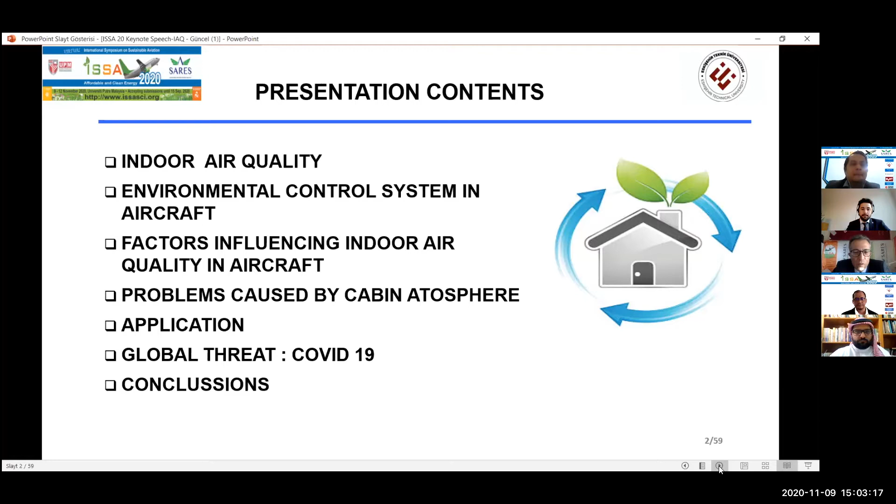Especially in passenger aircraft, comfort criteria and flight safety are a priority depending on the increasing demand. In this context, the manageability of indoor air quality, especially system components, has become valuable to international aviation organizations. The development of effective control systems in indoor air management, pollutant control, and related filtration systems can be seen as important stages. However, recirculation air, reclamation, and fresh air mixtures in aircraft are continuing practice in modern aircraft, meaning that especially life-threatening pollutants are given back into the same environment.

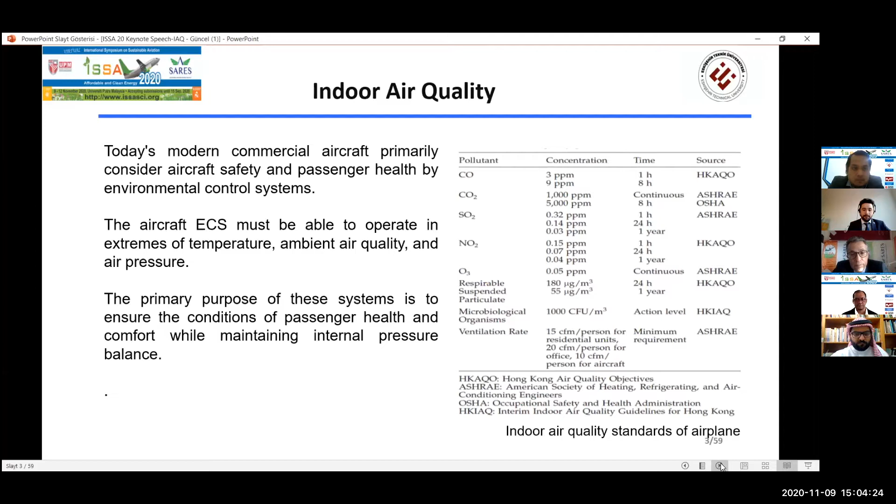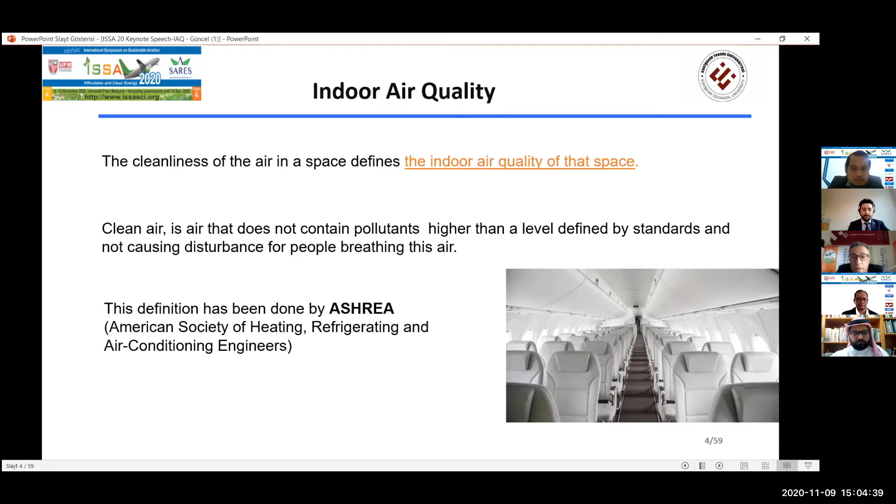In international standards, CO2, CO, ozone, relative humidity, and temperature have been accepted as basic parameters of indoor air comfort standards. The keys to clean air include a high rate of fresh air flow, high efficiency particulate air filters, commonly called HEPA filters, and design of aircraft airflow distribution.

The biggest factor in cabin air quality is inflow of fresh air. Aviation regulatory authorities such as the Federal Aviation Administration and the European Aviation Safety Agency require a minimum rate of 0.55 pounds per minute of outside fresh air flow per occupant. In a large commercial passenger aircraft, that means a typical environmental control system may replace the air occupying the cabin every 2 or 3 minutes, about 20 to 30 times per hour. By comparison, the general guidance for fresh air inflow in buildings is only 4 changes per hour.

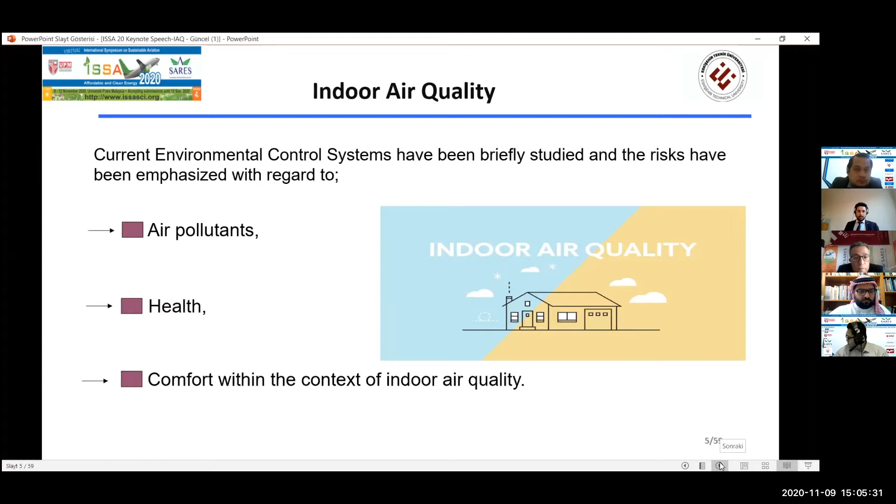In this presentation, current environmental control systems have been briefly studied and the risks have been emphasized relating to air pollutants, health, and comfort within the context of indoor air quality.

Recently, the number of passengers who prefer traveling by aircraft has increased substantially. These passengers are people who probably suffer various ailments and are of various age groups.

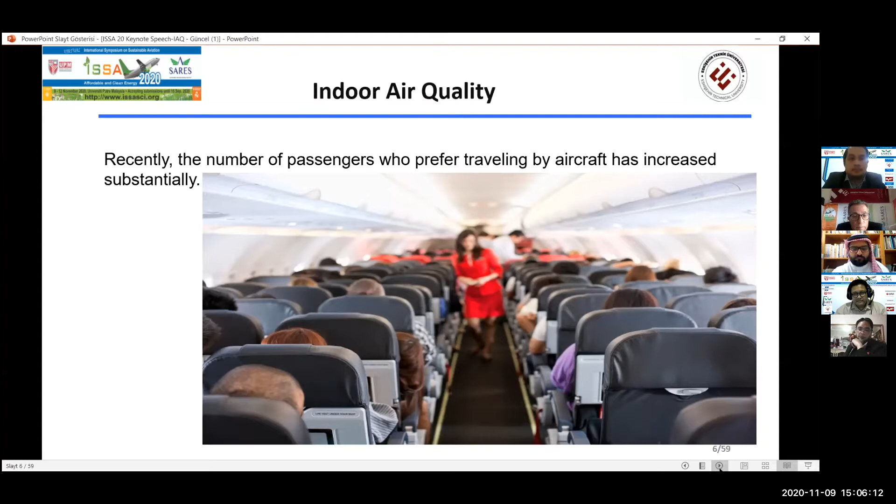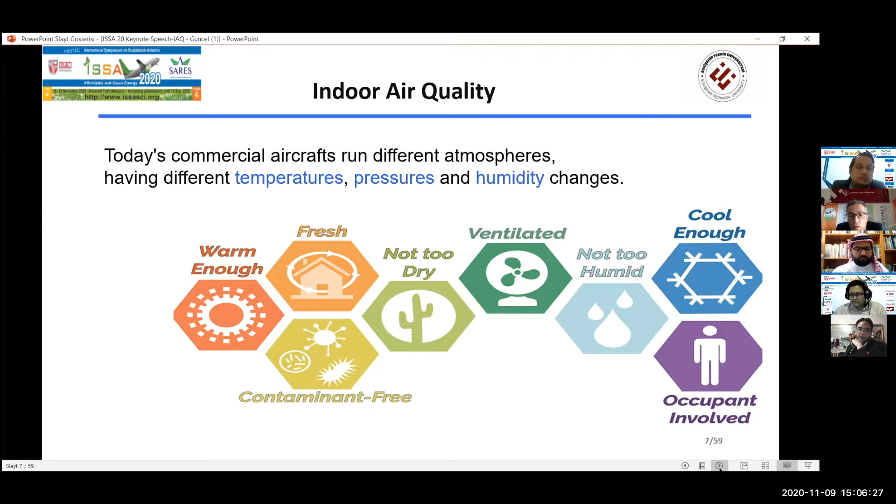Today's commercial aircraft run different atmospheres, having different temperatures, pressures, and humidity changes. Aircraft cabins have indoor characteristics similar to those in houses and office buildings. But still, these cabins differ from other buildings in some respects, such as available space per person, pressurizing requirements, and activity levels within the cabin.

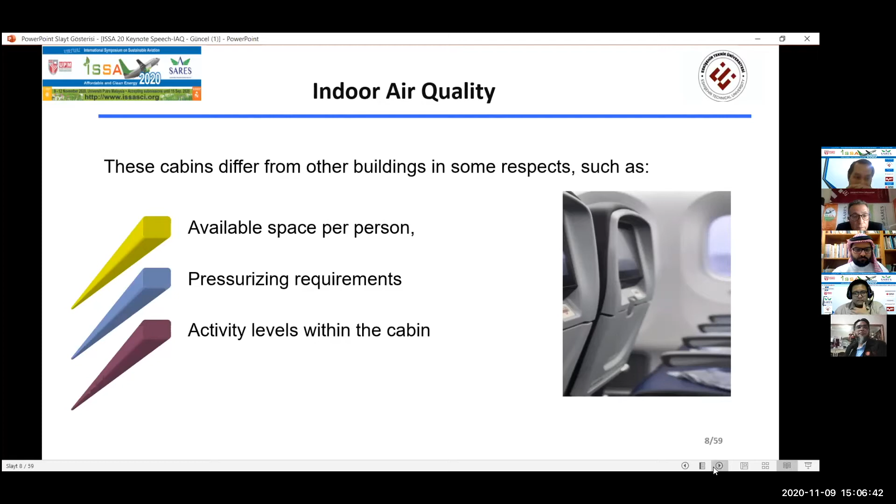Passengers are exposed to atmospheric factors such as reduced air pressure, various air pollutants, ozone, carbon monoxide, and other organic chemicals and biological structures, and low humidity.

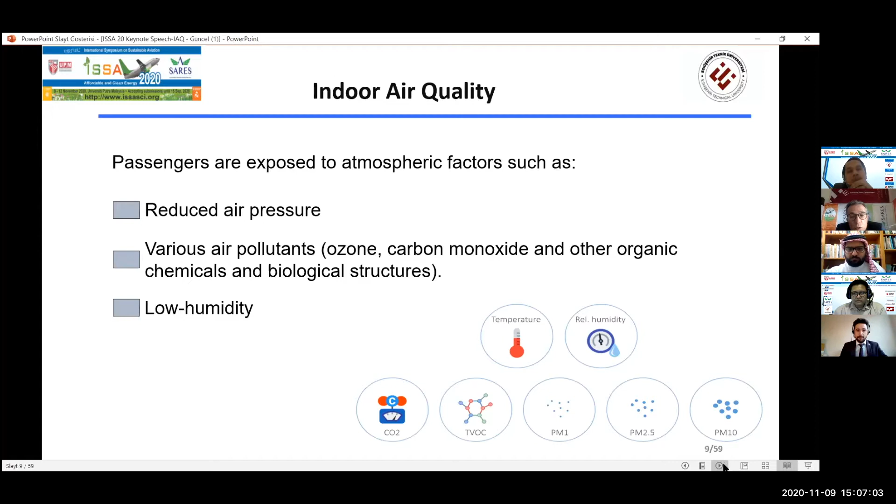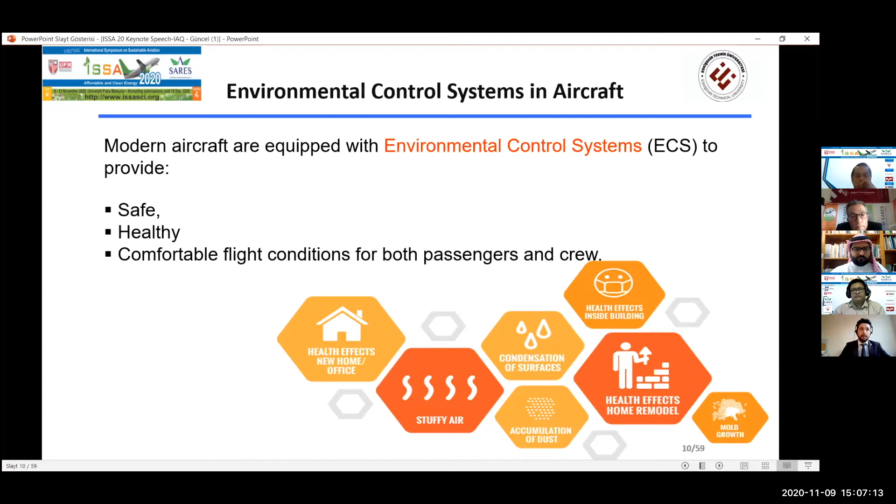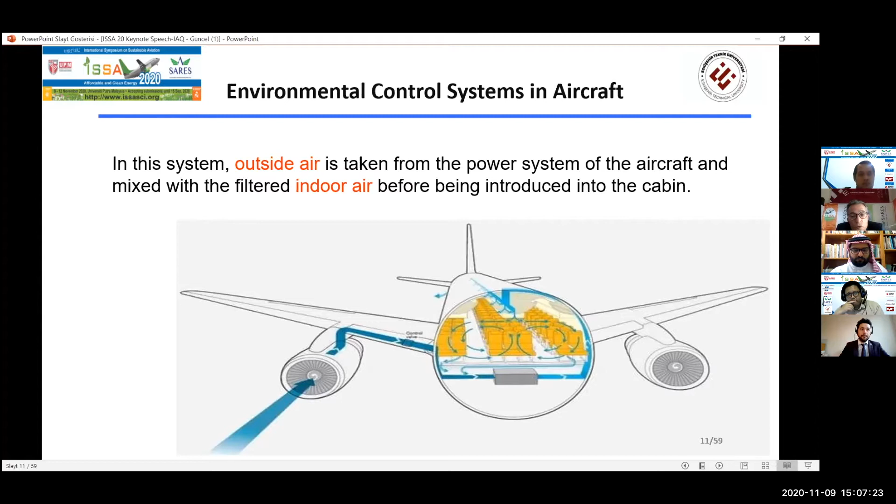Modern aircraft are equipped with environmental control systems to provide safe, healthy, comfortable flight conditions for both passengers and crew. In this system, outside air is taken from the power system of the aircraft and mixed with the filtered indoor air before being introduced into the cabin. This has been designed to reduce air pollutants that can possibly enter the cabin and to control temperature, pressure, humidity, and ventilation of the cabin air.

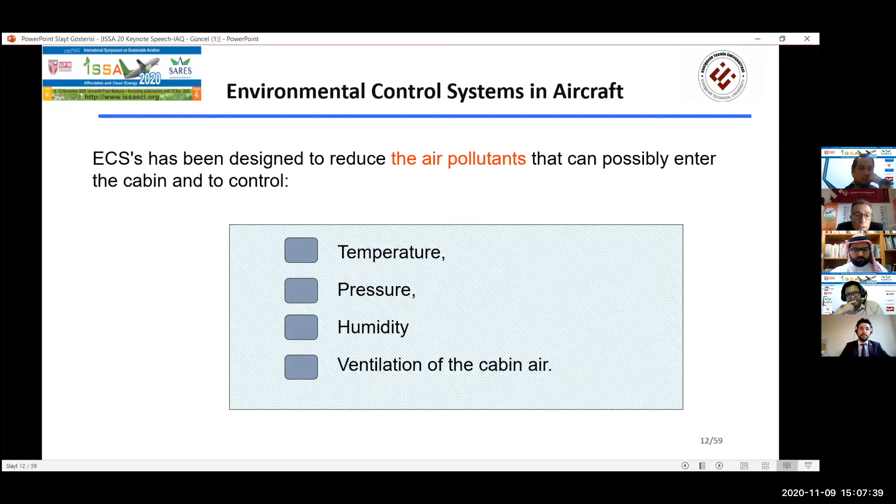The environment that today's aircraft travel in is not the atmosphere with physical conditions that people can live in without any protection. For this reason, rather complicated ECS systems are used in modern commercial aircraft. Environmental control systems have been designed to meet physiological needs of human beings in any flight condition and to provide defined comfort levels during the flight.

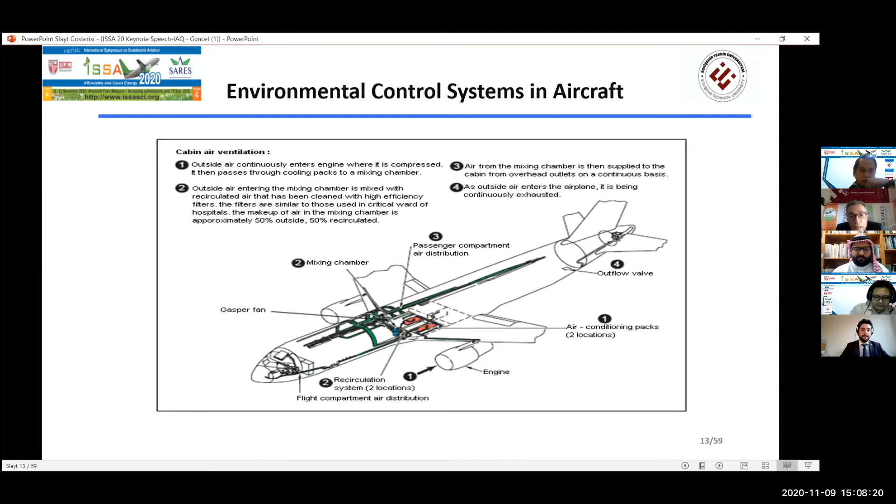The design of the cabin ventilation system is based on introducing ventilated air into a row of seats, collecting and discharging the air from the same row. Such an approach essentially reduces the risk of spreading infections within the aircraft cabin.

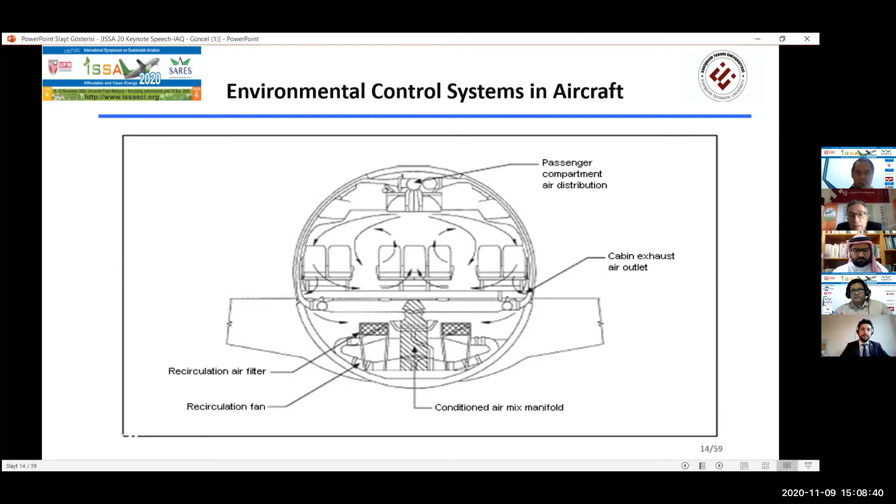The environmental control system is the most important component for the passenger and flight crew, providing a safe and healthy flight, especially in different environmental conditions. This system provides pressure balance and flight safety. Air distribution system is an important component of this structure.

The environmental control system of the aircraft provides air supply, thermal control, and cabin pressurizing for the crew and passengers. Avionics cooling, smoke detection, and fire suppression are also commonly considered part of the aircraft's environmental control system.

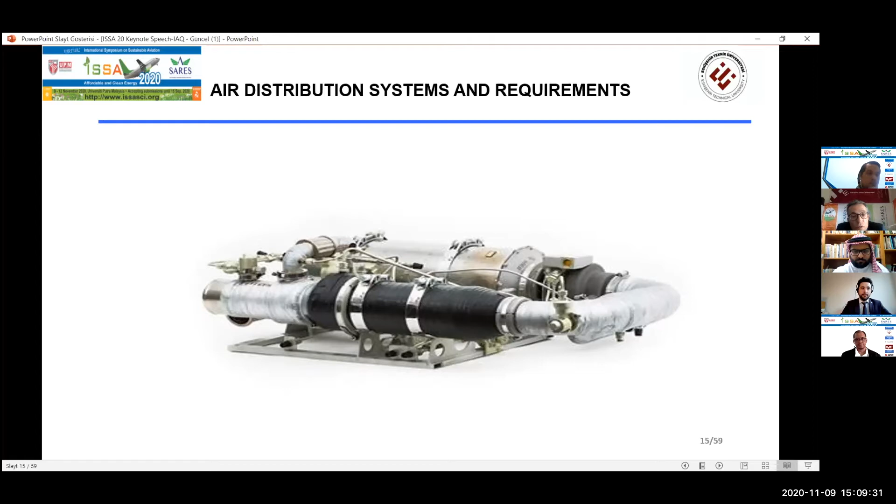The system providing effective distribution of the air in the cabin is differently conditioned for each part of the aircraft. The performance of distributed air is related to the air circulation coefficient. The minimum and maximum values of circulation coefficient are 10.4 and 26.4 respectively, depending on cabin type and capacity. Cabin air is renewed every 2 or 3 minutes.

The use of HEPA filters and top-to-bottom air circulation ensure aircraft cabins continue to be a safe environment for all passengers on board.

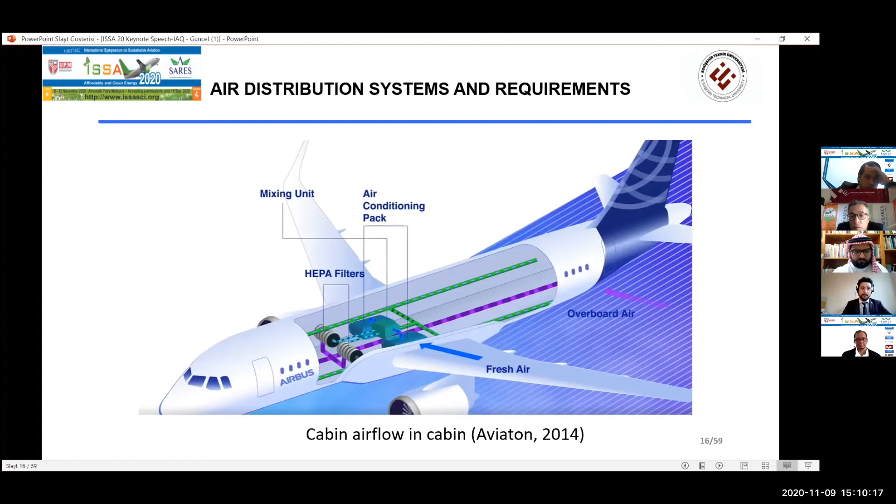Management of air conditions in cabin air conditioners, pollution parameters, and homogeneous air distribution are based on a multi-directional management infrastructure. Although the prediction of the standards is 50% for recirculated bleed air, this ratio can reach up to 80% in some applications. Thermal comfort must be managed with respect to the flow chart, which includes seasonal and altitude conditions. These parameters are a little bit different in the aircraft.

In an example, the hot bleed air must be cooled off first. The directed air is chilled and sent to the heat exchanger. The bleed air is chilled in the expansion turbine. Then it is sent to the distribution system after the relative humidity is controlled.

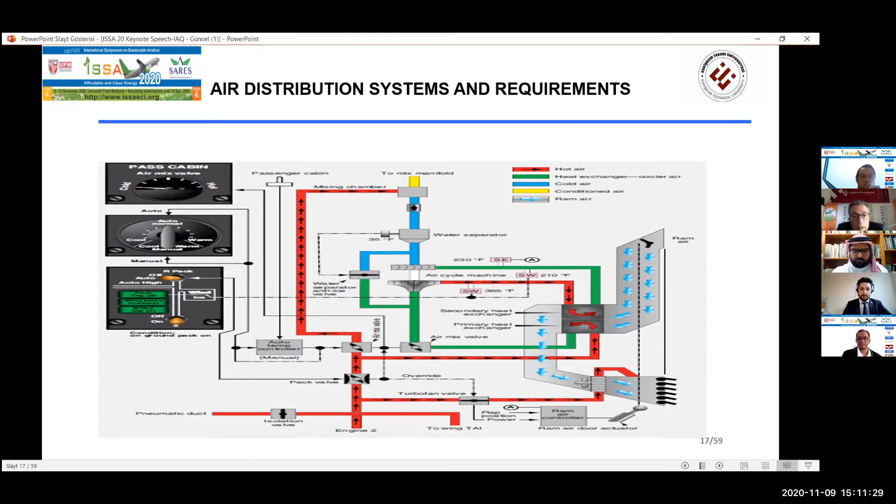Cabin ventilation has several optional features. This includes the humidity envelope, using a source of dry ventilation air to provide radiant heating and cooling the cabin space, using appropriately thermal conditioned ventilation air as the envelope air supply to raise cabin humidity by preventing cabin air entering the envelope where its moisture will condensate on the cold fuselage, to protect against fire risk, and to facilitate the energy saving potential of new aircraft ventilation ejector technology.

Thermal comfort management should be seen as a very important issue. Simulations on this issue in the literature have shown that it is not possible to achieve a fully homogeneous effect, especially when considering the passenger.

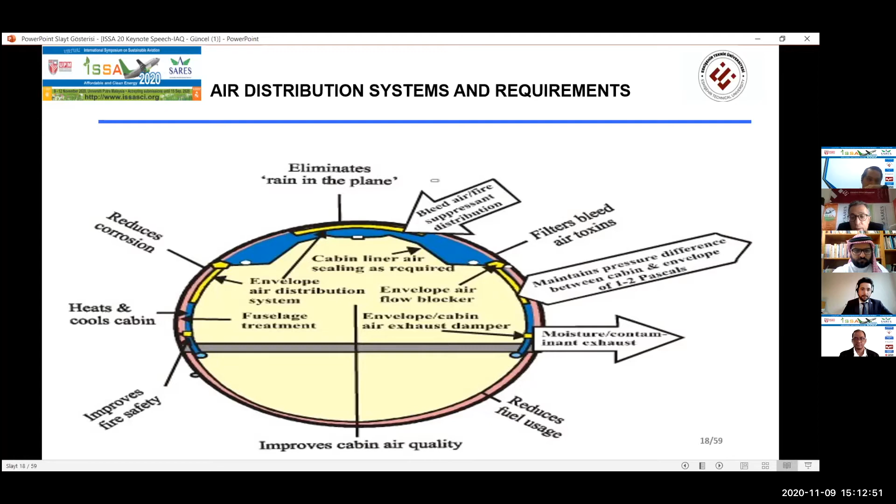For the passenger, a closer look at the local comfort rating shows that existing distribution infrastructure has some disadvantages for some body parts. The thermal comfort management of distribution systems is not fully realized, especially depending on the climate conditions.

The comfort conditions must be taken into consideration for each passenger, but current system designs are far away from this point. The control of average speed and flow rate from the blowing duct gives very average comfort results. Mixing air rate is also determined over these average values.

Thermal comfort conditions for summer and winter are determined accordingly. In general, the cabin temperature is set at 29 centigrade as maximum.

Different methods are used for cleaning of recirculated air: HEPA filter, active carbon, and cold plasma. The distribution ducts have different structures. The current duct systems cause problems in meeting thermal comfort conditions, especially for commercial flights. That's why there's a need to manage local control structures along with IT architecture.

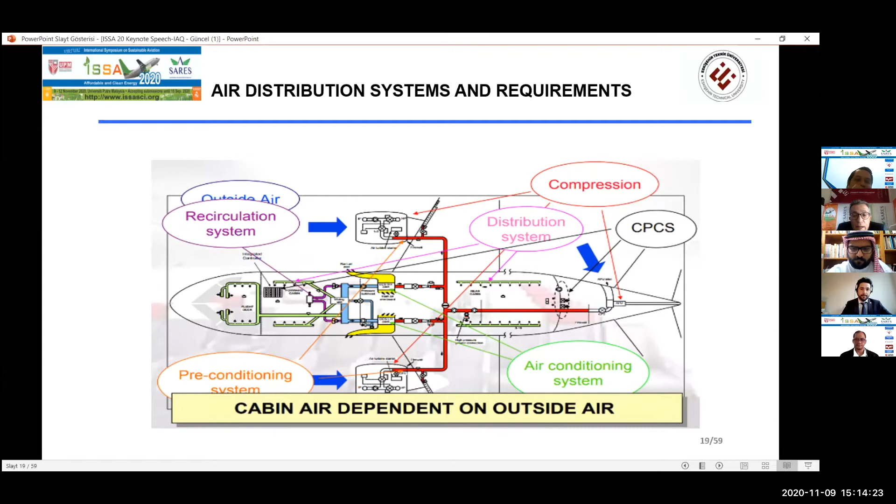Management of air conditions in air conditioners, pollution parameters, and homogeneous air distribution are based on the multi-directional management infrastructure.

In existing control regulation, the cleaning of the return air with standard filtration is the primary concern, primarily when pressure and temperature control is the basis. In addition, it is very difficult to detect different pollutants via pollution detection. It seems that the system configuration needs to be redirected, and an effective information architecture is needed.

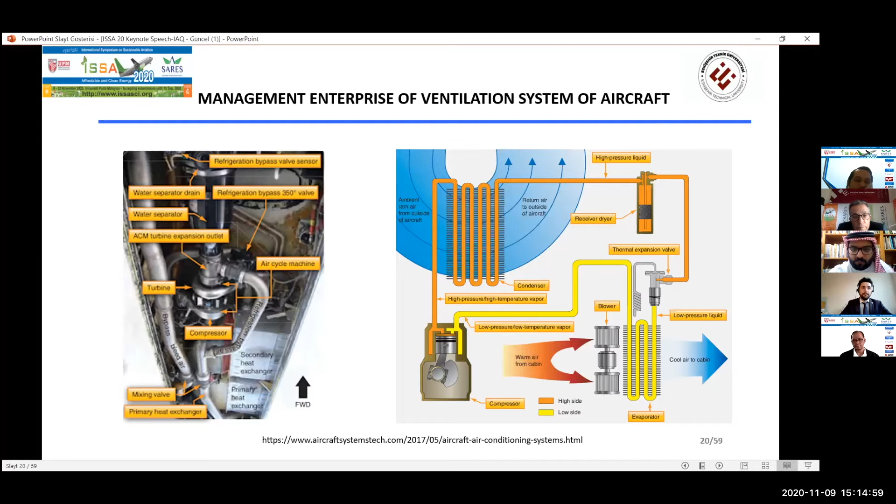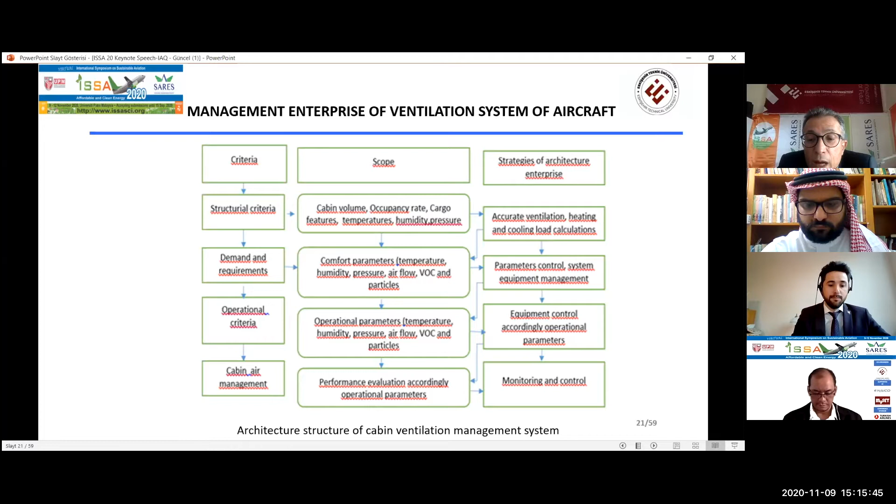The occupancy rate and pollutant source, cabin and luggage load directly affect all parameters. In this context, the management algorithm should be considered in dynamic structure. Especially in strategy 1, it is important if the load calculations are changed depending on the aircraft and navigation process, and IT information technologies architecture for dynamic management of cabin control conditions provide to be concentrated on the work control equipment, while providing effective management for direct comfort management.

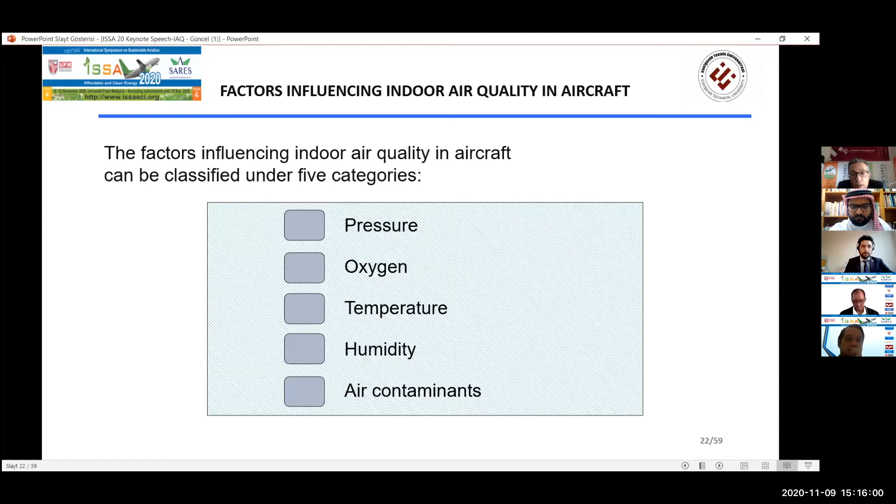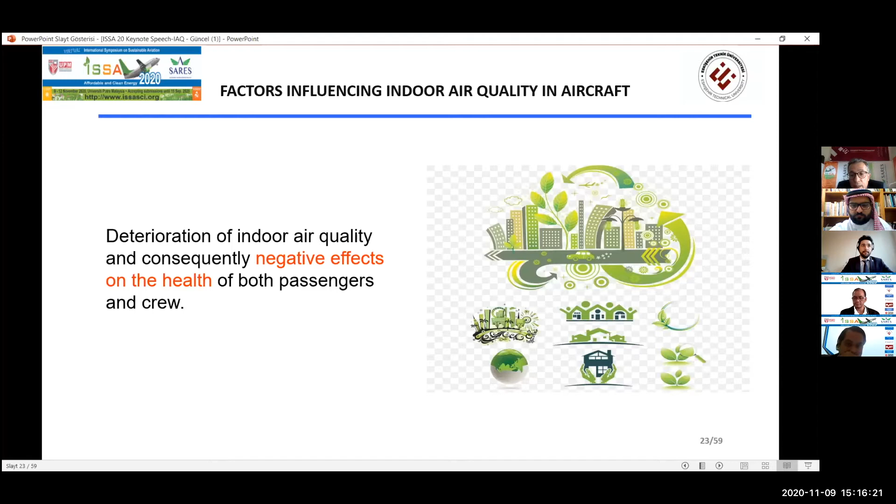There are several factors influencing indoor air quality in aircraft which can be classified into five categories: pressure, oxygen, temperature, humidity, and air contaminants. Inadequate fresh air, instant changes in the levels, or interaction between these factors can cause deterioration of indoor air quality and consequently negative effects on the health of both passengers and crew.

This condition makes it more efficient to fly at higher altitudes. For this reason, almost all commercial aircraft cabins are pressurized for safety of both the crew and passengers.

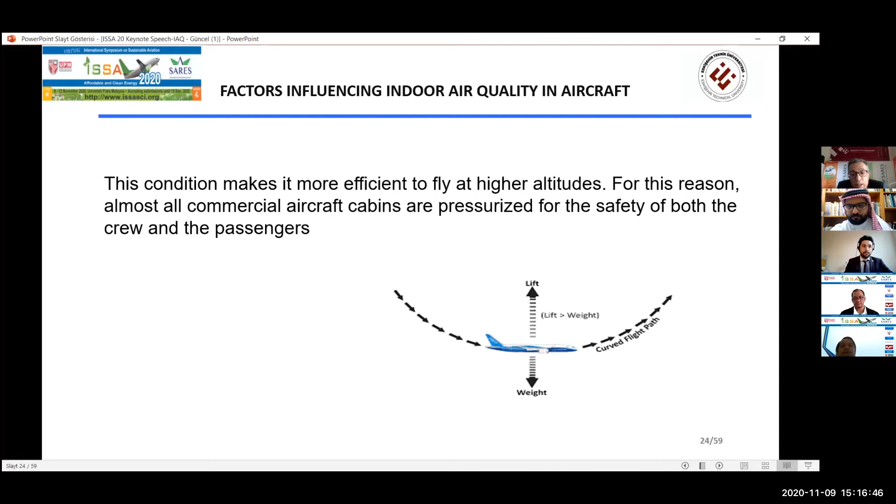Pressure: even though the cabin pressure is intended to be held constant at 2,450 meters, this level of pressure is lower than that at sea level. This level pressure has some negative effects on physiology of passengers. The reduced pressure causes expansion of the air trapped in body cavities and creates some minor sicknesses, while in sensitive metabolisms, it can cause more serious health risks.

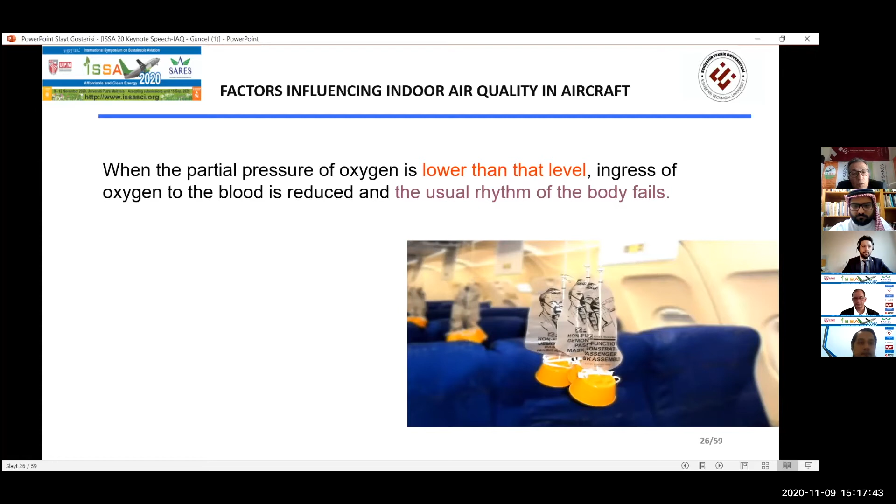When the partial pressure of oxygen is lower than that level, ingress of oxygen to the blood is reduced and the usual rhythm of the body fails.

In general, the temperature of the cabin is taken not as a health issue but mostly as a comfort issue. However, it can cause health problems together with other psychological and biological factors. Temperature affects the liquid loss of the passenger and the crew.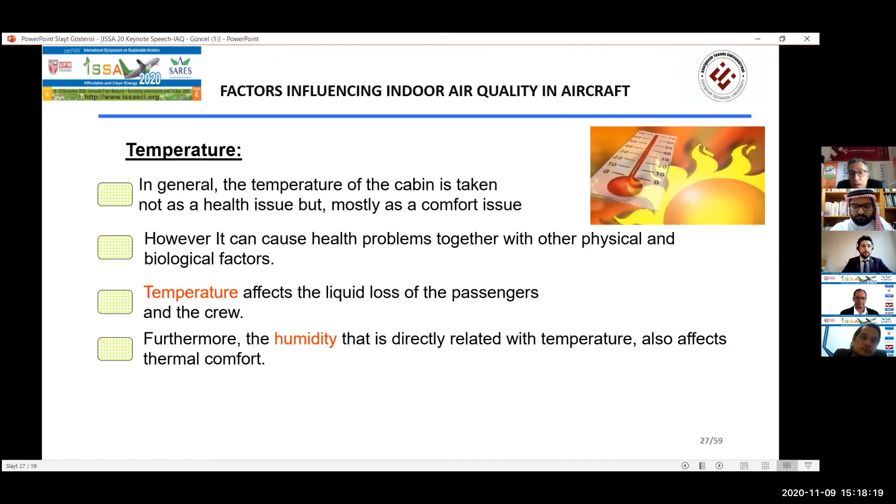Furthermore, humidity, which is directly related to temperature, also affects thermal comfort. As is well known, high temperature and low humidity cause sick building syndrome. Sick building syndrome reveals itself as exhaustion, headache, irritation of the skin and mucous membrane, all acute symptoms.

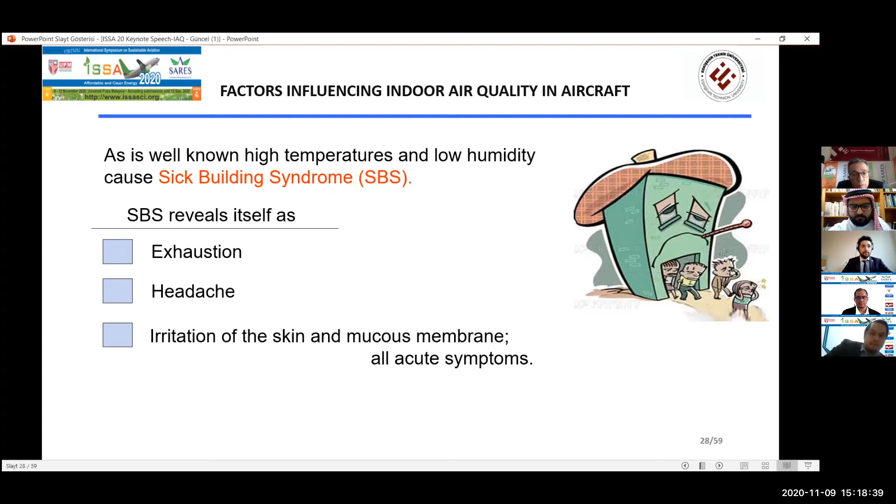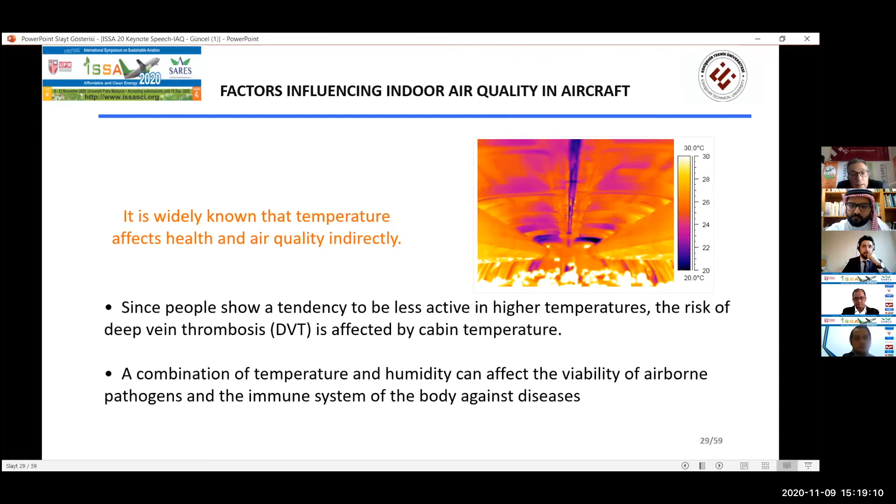It is widely known that temperature affects health and air quality indirectly. Since people show a tendency to be less active in higher temperatures, the risk of deep vein thrombosis is affected by cabin temperature. A combination of temperature and humidity can affect the viability of airborne pathogens and the immune system of the body against diseases.

Relative humidity of cabin air has two significant characteristics with regard to indoor air quality: passenger comfort, and aircraft structure and safety, particularly in high temperatures. Relative humidity in the aircraft cabin, when it is higher than 70%, creates a displeasing environment for passengers. In this situation, condensation occurs in the cabin and water droplets can cause corrosion that is harmful to the aircraft structure.

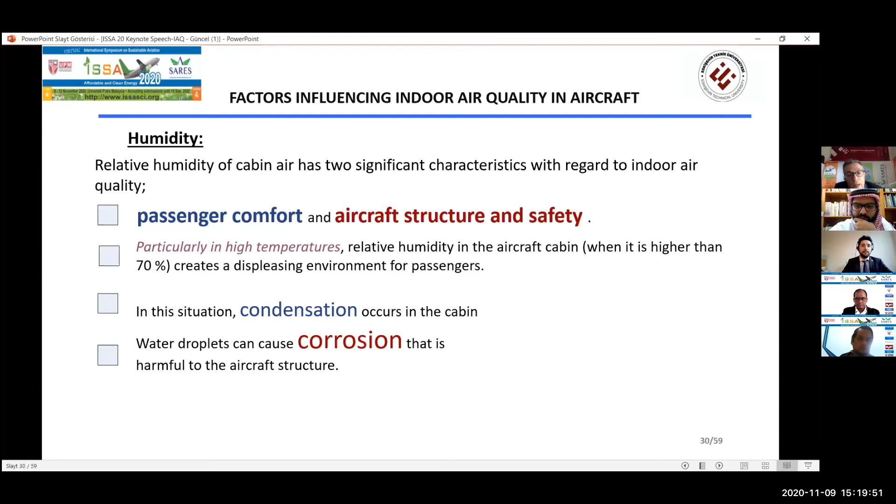Temperature affects health and air quality indirectly. The effects of jet lag with high temperature are fatigue and reduced alertness and concentration, impairment of mental performance including memory loss, and digestion problems.

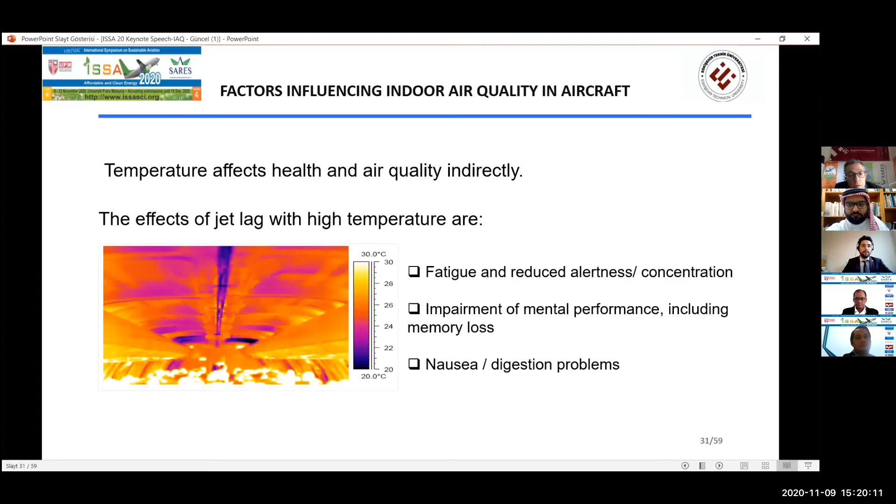Enhanced ECS systems in today's modern aircraft dry the air taken from outside using moisture separators. Thus, the main source of humidity in the cabin is the respiration of passengers and evaporation from the human body. By mixing outside air and recirculated air from the cabin, a relative humidity of approximately 10 to 20% is achieved.

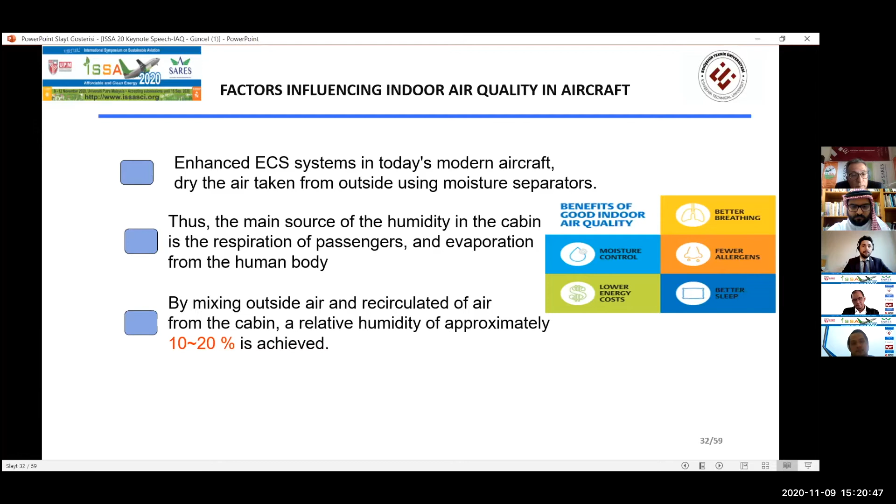In many aircraft cabins, depending on the aircraft type, the humidity varies between 15% and 19%. Lower humidity can cause drying of body surface, mucous membrane and skin, and irritation in eyes. Drying in mucous membrane and eyes particularly causes the eyes to become watery and painful. Lower humidity can seriously affect people who suffer from asthma, respiratory illness, and trachea disease.

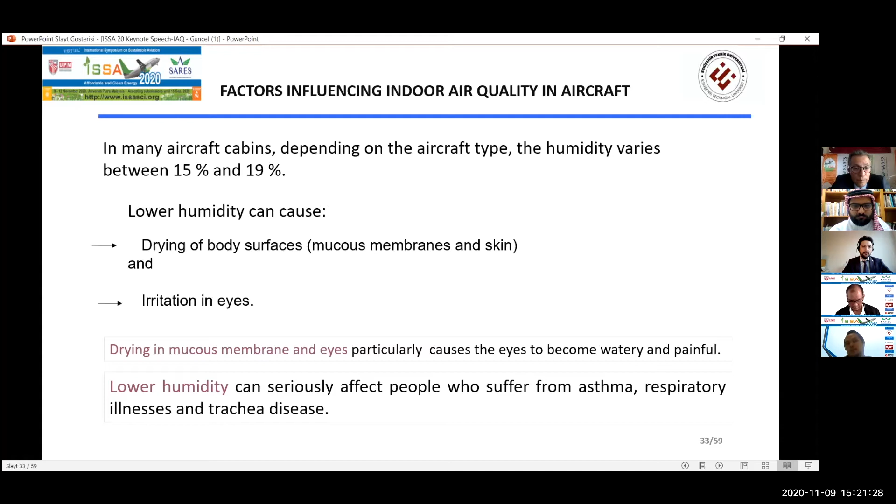Little is known about the environment in which aircraft passenger cabins are under routine flight conditions, and what is known is limited in scope. However, it should not be forgotten that there is a systematic relationship between the source strength of the pollutants, physical factors such as ventilation rates and operating modes, occupancy loads, and activities.

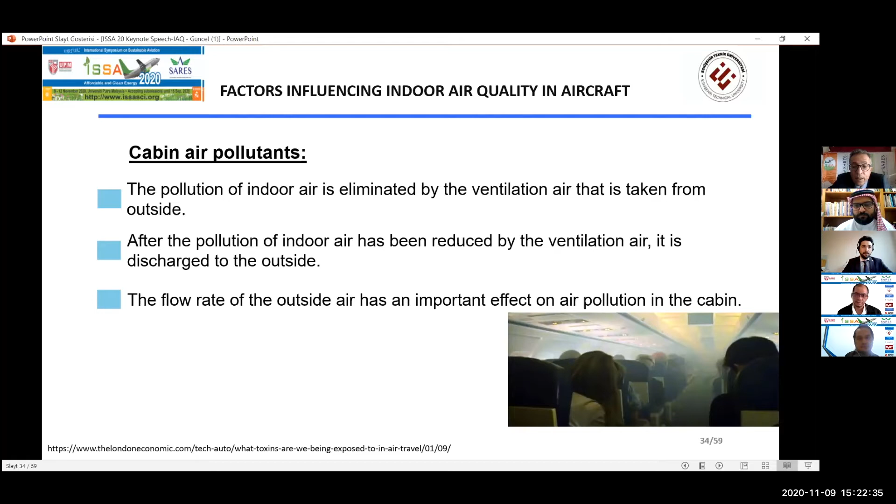Although there is not enough information about these contaminants, they are known to be potentially dangerous or cause acute irritation. However, based on the literature, it can be said that ozone, cosmic radiation, ground smoke, tobacco smoke, and carbon monoxide, biological aerosols, relative humidity, cabin pressure, carbon dioxide, volatile organic chemicals, and pesticides can be evaluated within this scope. It is relatively easy to estimate dose equivalent exposure for the person during the flight process.

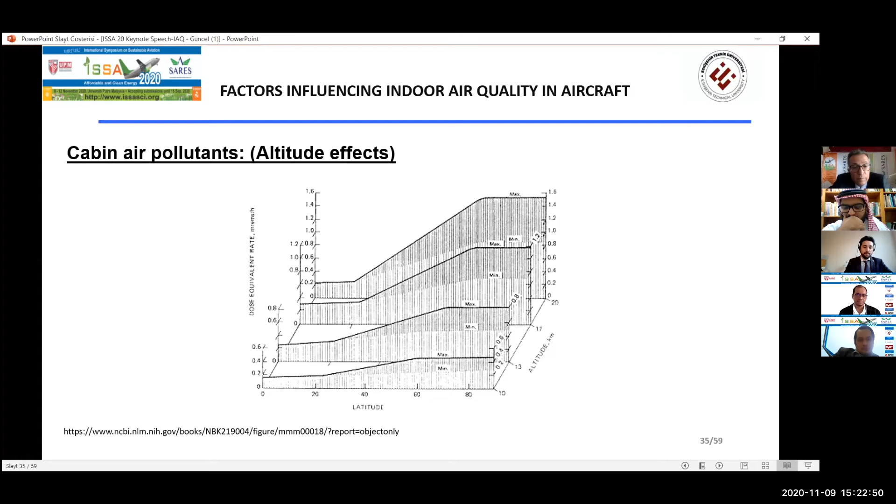Another pollutant for aircraft cabins is air aerosols. In this context, studies based on the characterization of indoor aerosols in the cabin are also seen in the literature in recent years. Ultrafine particle concentrations, especially in aircraft cabin environments, can be considered in this context.

Ultrafine particles, with aerodynamic diameter less than 100 nanometers, have been correlated with morbidity and mortality from respiratory and cardiovascular diseases due to their extremely small size and large total surface area, which make them more likely to carry harmful substances such as heavy metals or gaseous pollutants into the alveoli and blood.

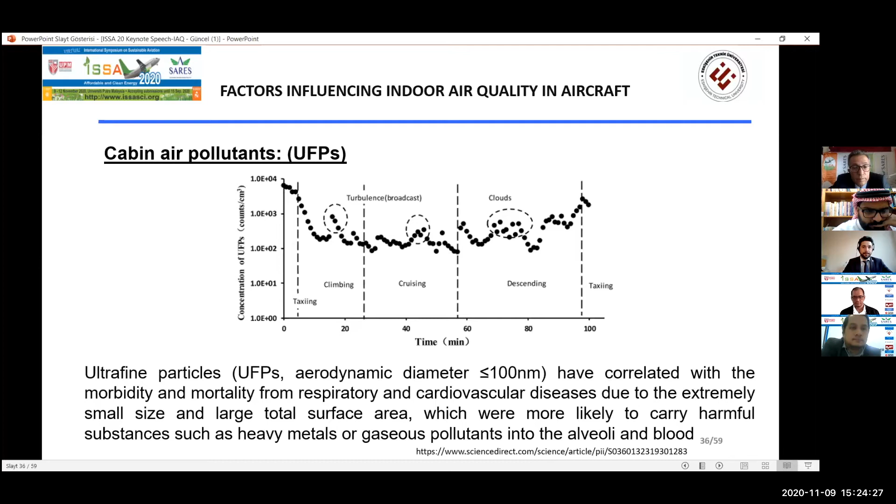The main threat in the cabin is exhaled carbon dioxide produced by passengers and crew members through their metabolisms. The occupancy rate is the most affected parameter of carbon dioxide concentration.

Researchers indicated that carbon dioxide concentrations in return air decrease first, then stay steady, and finally increase overall during flights, possibly affected by the adjustable outside airflow rate. Variations of carbon dioxide concentration and outside airflow rates in the aircraft cabin were comparable.

However, it is seen that in some instances it generally exceeds 1000 ppm during flight stages, which can be attributed to the lower outside airflow velocity.

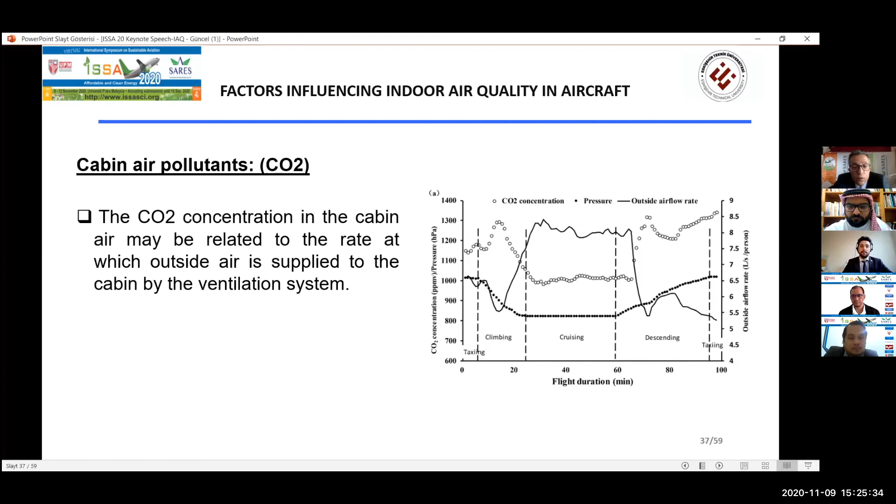Ventilation air introduced to the cabin is taken from outside the aircraft, so any pollutant can enter the passenger cabin. Most airports are situated near big cities, which often have significant air pollutant problems.

Furthermore, exhaust emissions at airports are another pollution source. During aircraft landings, exhaust gases and vapors from de-icing chemicals entering through open doors can form a serious risk to health.

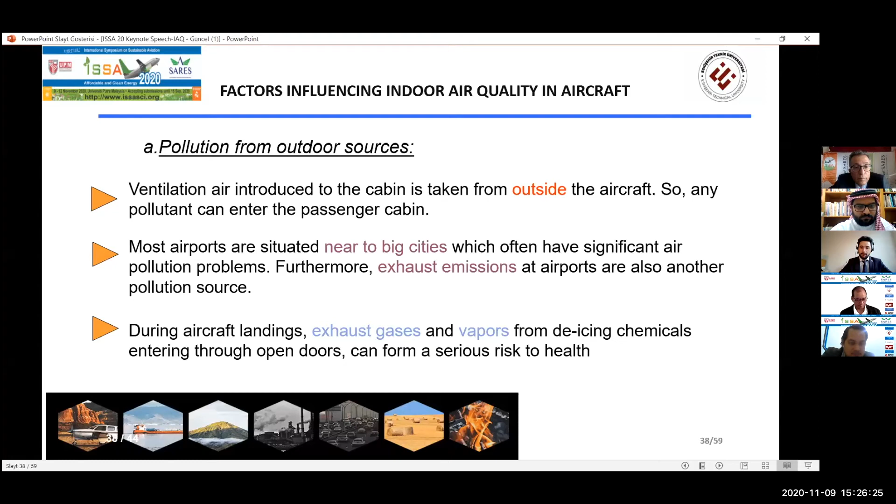Another threat is NOx and SOx emissions from jet fuel carried to the cabin via bleed air. These gases cause irritation on lung tissue.

Ozone is widespread, especially in summer, at latitudes of 40 degrees and above and altitudes of 9,000 meters. Ozone enters the cabin via feeding air and causes acute and chronic diseases related to respiration.

Additional threats, particle substances, are caused due to the clothing and goods loading process and runway activities.

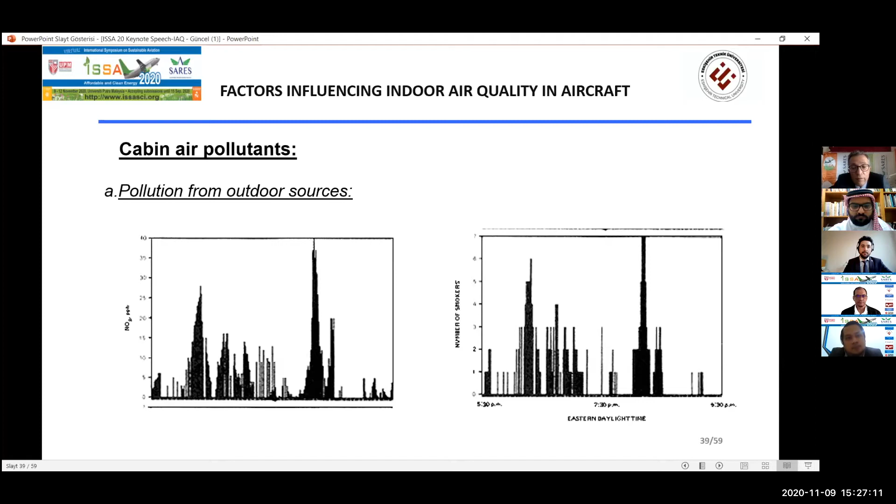Since most flights are at high altitudes, pollutants in the outdoor air are at very low levels. At these high altitudes, the main pollutant source is ozone. Ozone causes respiratory problems, increases asthmatic complaints, and damages the body's immune system.

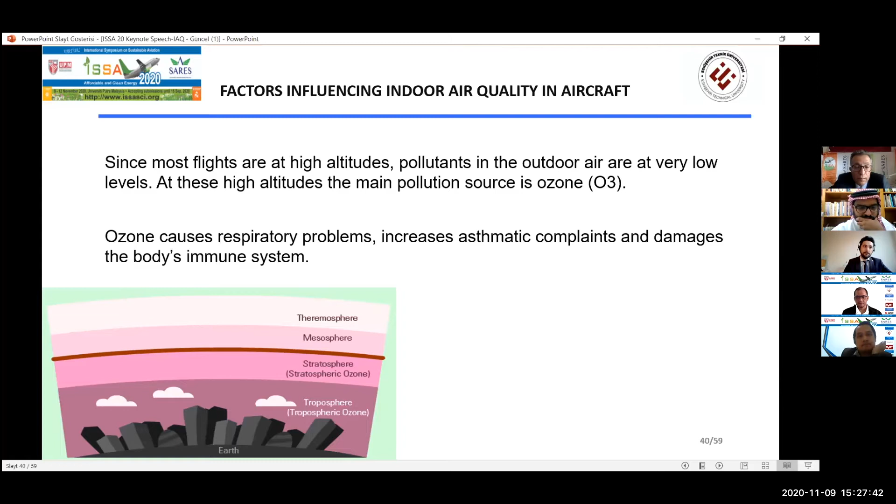Internal pollution sources: pollution from internal sources is caused by viruses, bacterial organisms, and other microorganisms from crew and passengers. The most important pollution source is carbon dioxide produced by respiration.

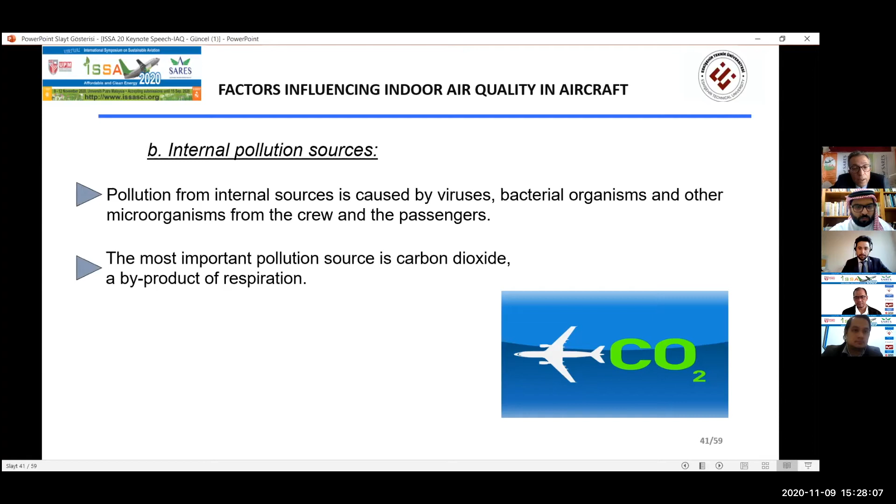Many countries insist on elimination of insects from aircraft that take off from countries where malaria and similar diseases are prevalent. To protect the aircraft from insects and the like, various pesticides are used. These chemicals, used unsatisfactorily, can cause a risk to health.

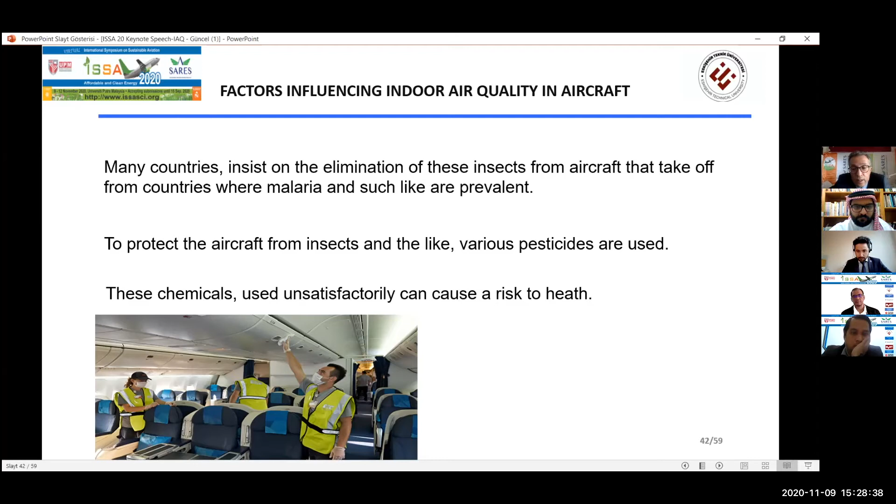The air in passenger cabins is dry, with relative humidity of 10% as the flight progresses. Meanwhile, a portion of the cabin air, with its ventilation components of very dry outside air plus filtered recirculated air, and humidity components, passes from the cabin to behind the cabin insulation, drawn there through liner leaks and openings by stack pressures. Some of this air is lost as useful ventilation air.

However, all the air drawn there loses its humidity prior to recirculation, depositing its moisture as condensation on the very cold fuselage behind the insulation.

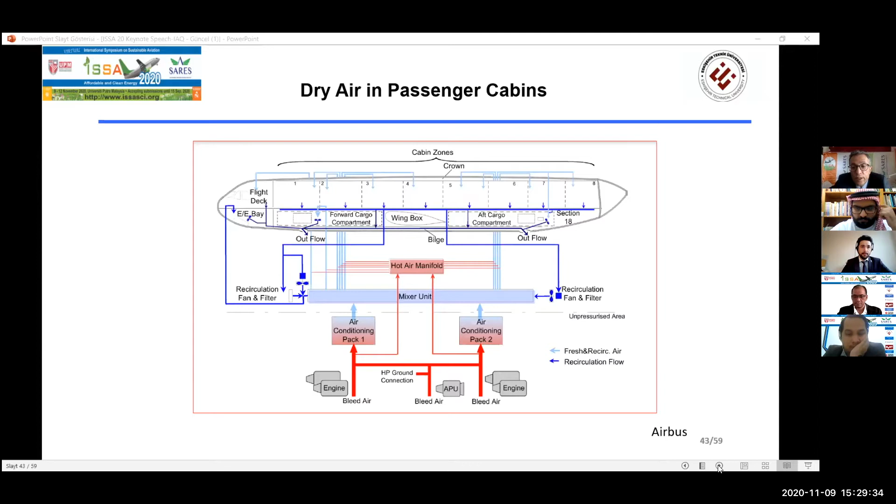The airplane's cabin air is mostly cleaned by HEPA filtration. In this filtration, the amount of fresh air circulated through these filters and delivered to the passengers is one-eighth of the circulating amount, while removing almost 100% of 0.3 micron and larger particulates.

Suspended air is circulated in the cabin. Highly controlled filtration is provided in cabin environments, with filtration sensitive to high airflows.

Air change depends on aircraft model and cabin features. Although there are different standards in this regard around the world, air exchange takes place 15 times in narrow body aircraft and 13 times in wide body aircraft, for flights lasting approximately 15 hours.

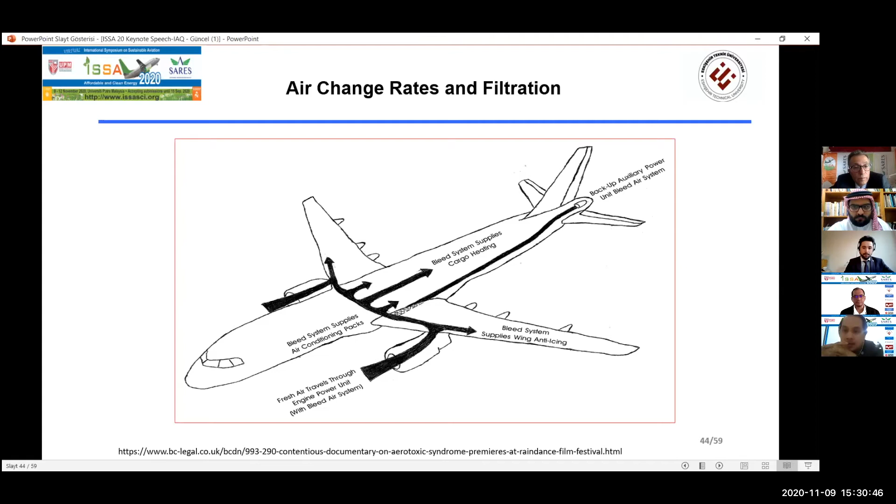Now I will explain the problems caused by cabin atmosphere. One of them is hypoxia. Hypoxia is a weakening of bodily functions caused by a shortage of oxygen in blood cells and tissues.

The shortage of oxygen can be due to various causes. The main cause is the reduction of partial pressure of oxygen in lung cells as a result of reduction in the pressure of oxygen in the environment.

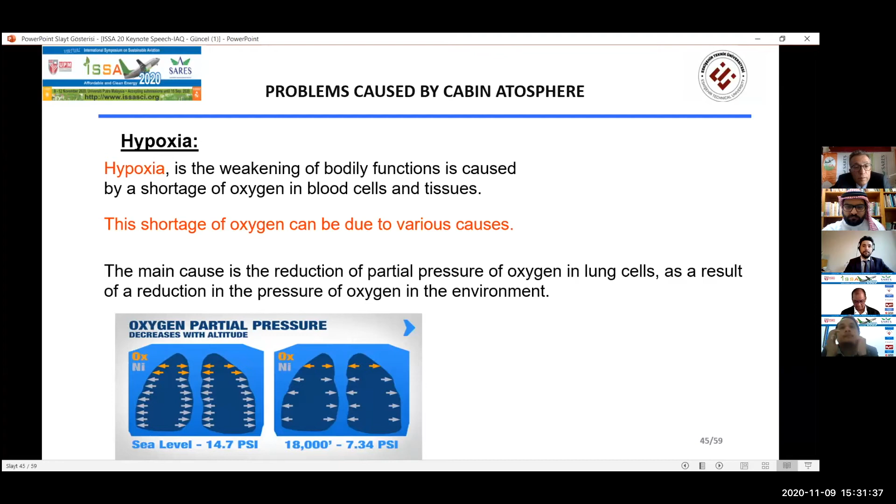Hypoxia may reveal definite symptoms, while sometimes there may be no symptoms. If hypoxia occurs with no symptoms, this is the worst situation for passengers, since they cannot be aware of the reduction in their bodily functions, and the following effects can be experienced:

slowing down in thinking and wrong calculations, weakening of memory and longer response time, higher number of breaths and cyanosis, weakening in reasoning, and coordination degradation in muscles.

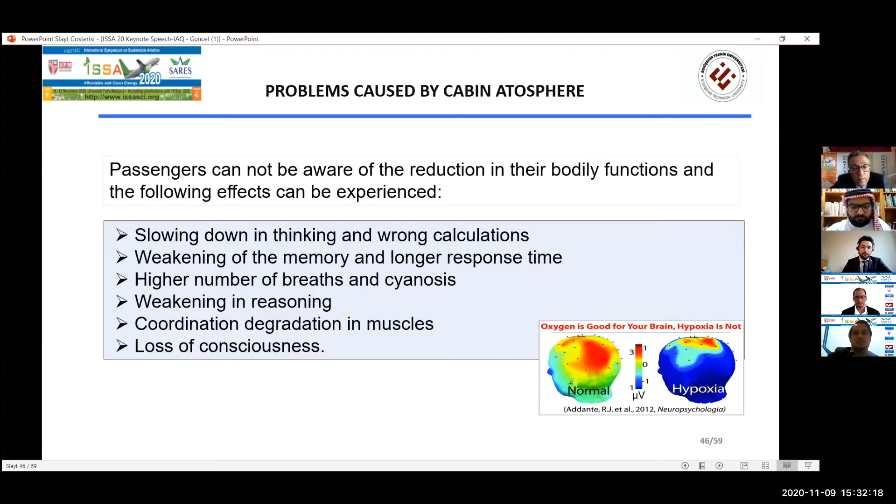Deep vein thrombosis is a blood clot in deep veins of the leg, although it can occur in other parts of the body. The danger is that part of the clot can break off and travel to the lung circulation, where it blocks one of the pulmonary arteries. The possible results are low oxygen levels in the blood, collapse, and even death. Studies focused on DVT have shown that this sickness occurs during long flights and particularly in older passengers.

In long-distance air travel, it causes symptoms either in the first few hours just after takeoff or after days of the flight, on average 4 days later. DVT is generally dependent on factors such as lack of movement, cramp, seating position, dehydration, and cabin pressure. However, this illness is not only a risk in air travel, but also in rail and road travel.

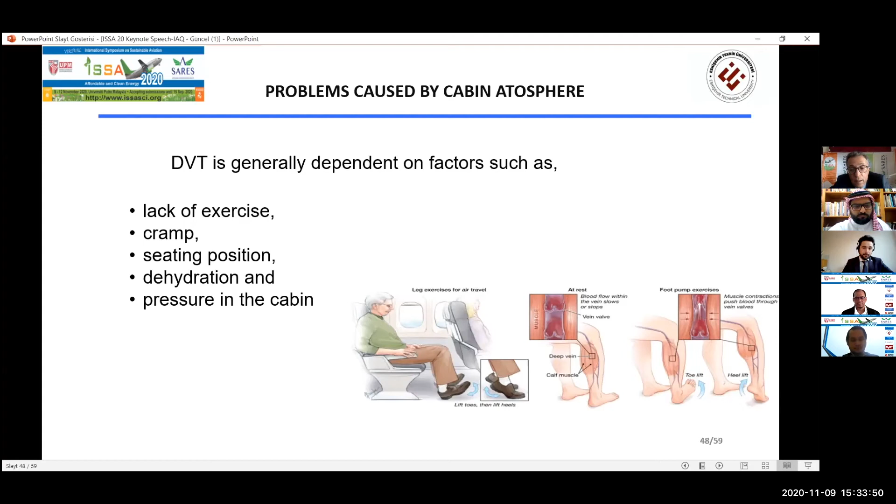Precautions and prevention of DVT: moving the legs up and down and back and forth at regular intervals, walking in the cabin for 5 minutes every hour, and taking deep breaths. Not maintaining the same position in the seat when sleeping, and frequently changing the lying down position.

Drugs causing drowsiness and alcohol must not be used during the flight. Before and during the flight, beverages must be consumed frequently. Water loss resulting from sweating and breathing increases the risk of blood coagulation. Clothing worn should be loose and comfortable.

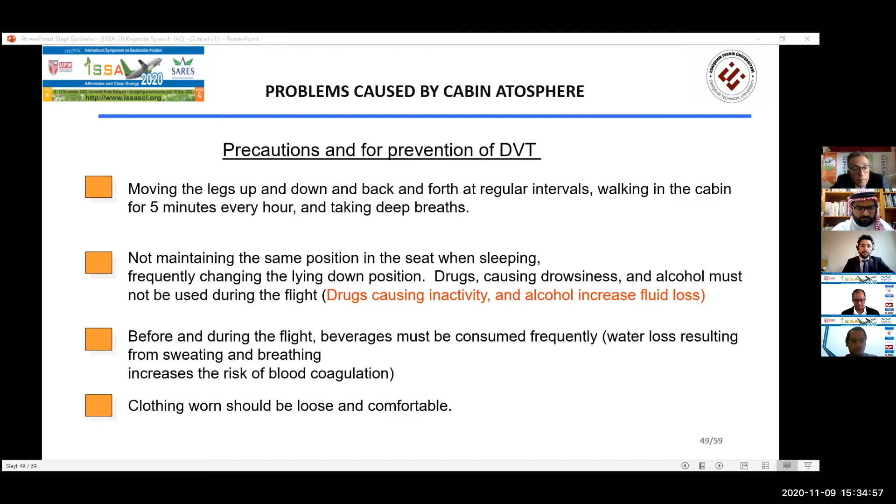In some long-distance flights, many complaints have been concerning infectious disease contracted by passengers and crew of aircraft. Many passengers are anxious about being infected by nearby passengers or recirculated air in the cabin. It is clear that there is an increased risk of infection caused by viruses and pathogens on long-distance flights.

The main sources of infection transmission in aircraft cabins are contaminated water and food, airborne person-to-person infection, and direct contact with people or body fluids.

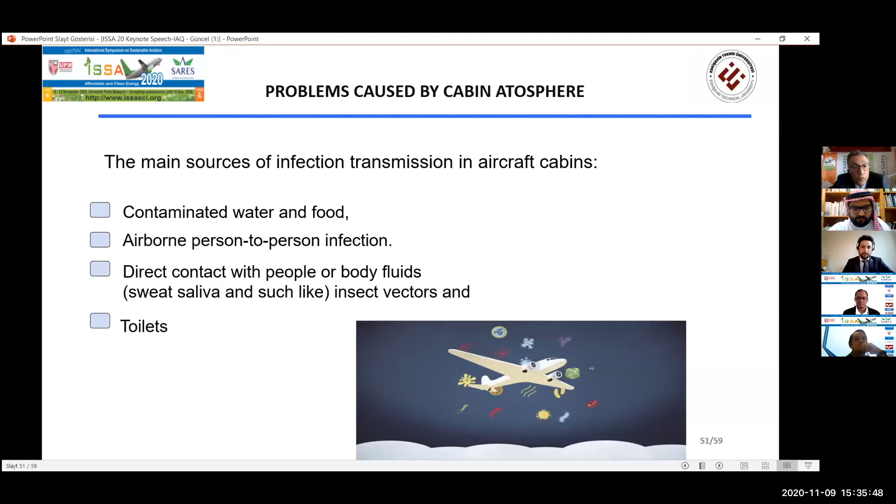In the context of the study, the questionnaire form had been prepared for passengers and crew of various airlines in Turkey. A literature survey and questionnaire process is the first stage of this study. The second step will cover the various measurements that will be conducted in airlines operating in Turkey regarding indoor air quality.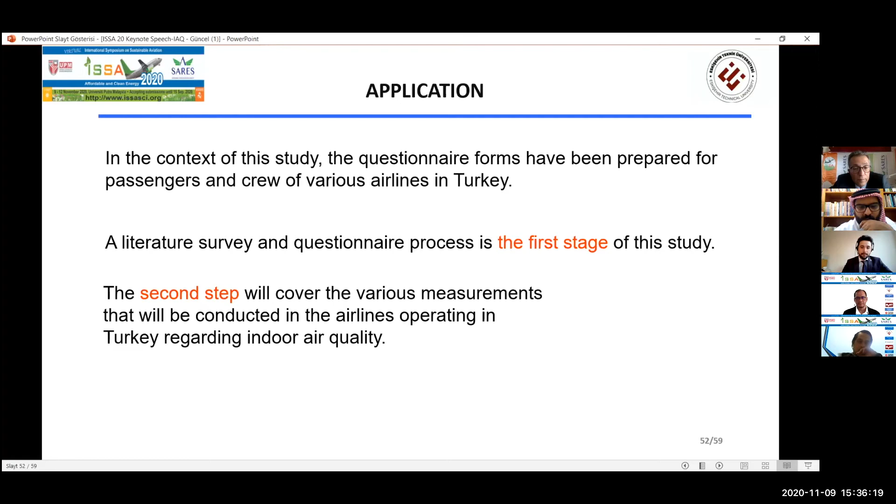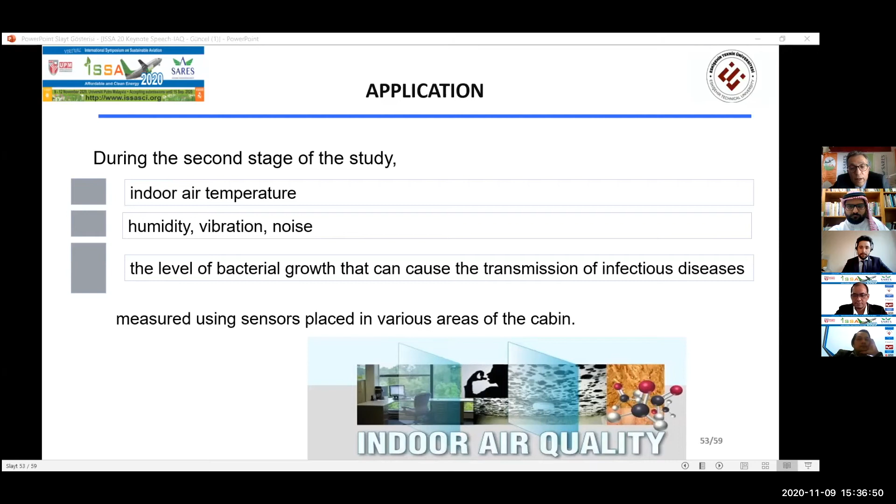The results of this study and the values from readings will also be revealed during the second stage of the study. Indoor air temperature, humidity, vibration, noise, and the level of bacterial growth that can cause the transmission of infectious disease will be measured using sensors placed in various areas of the cabin.

The International Air Transport Association demonstrated the low incidence of in-flight COVID-19 transmission with the updated tally of published cases. Since the start of 2020, there have been 44 cases of COVID-19 reported in which transmission is thought to have been associated with the flight journey. Over the same period, some 1.2 billion passengers have traveled.

The most important threat facing the world has directly affected the aviation industry, like all other industries. More than 4 decades after state and federal epidemiologists showed how easily viruses spread from person to person on airplanes, the novel coronavirus has decimated global aviation. Daily passenger screenings are down 95%, according to the Transportation Security Administration.

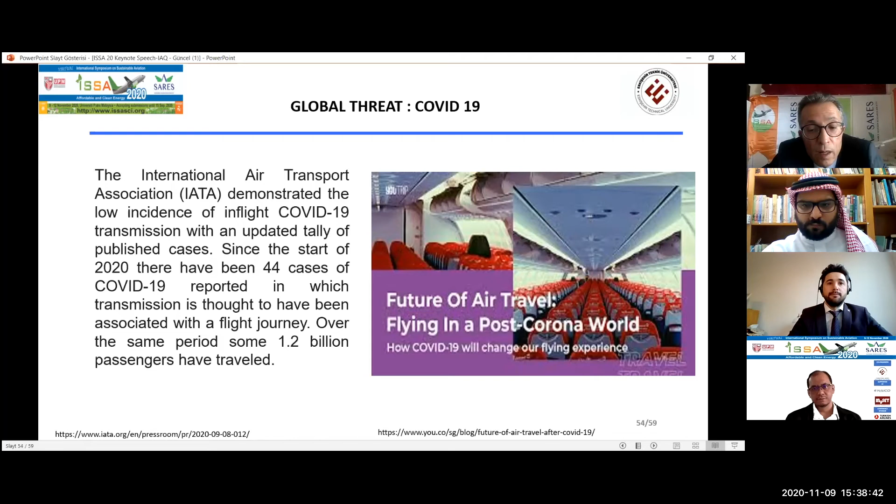All elements of the industry were negatively affected by the process. Airline companies were in very different situations before the COVID-19 crisis began. In particular, air transport is one of the sectors with the highest dispersion in productivity across firms, and to a lesser extent in profitability. While growth strategies were reviewed, many different measures were developed in this regard.

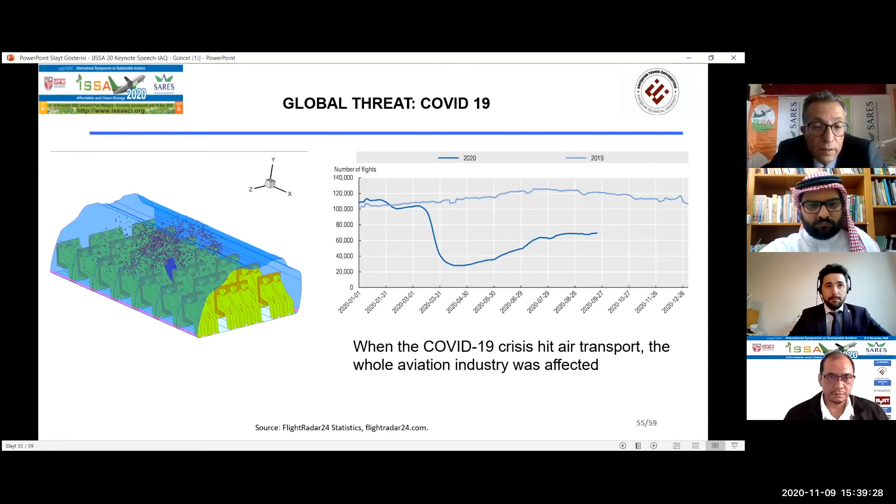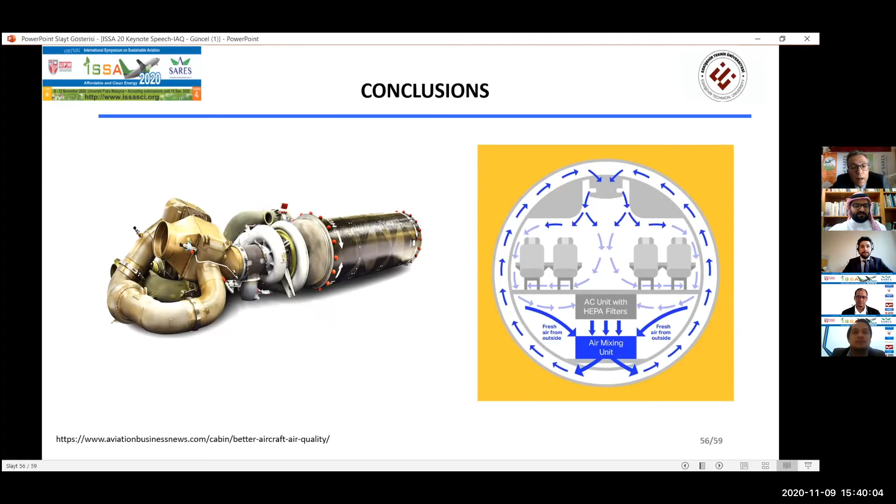Air is bled from the engines into the air management system where it is cooled and compressed, then expanded and delivered to the cabin. Cabin pressurization is derived from the bleed air pressure, with outflow valves in the fuselage allowing pressure to escape, enabling pressure to decrease as an aircraft flies higher and increase as it flies lower. It is all maintained as delicately as possible to maximize passenger comfort.

Vice President and General Manager of Air Thermal Systems at Honeywell, Tahir, says:

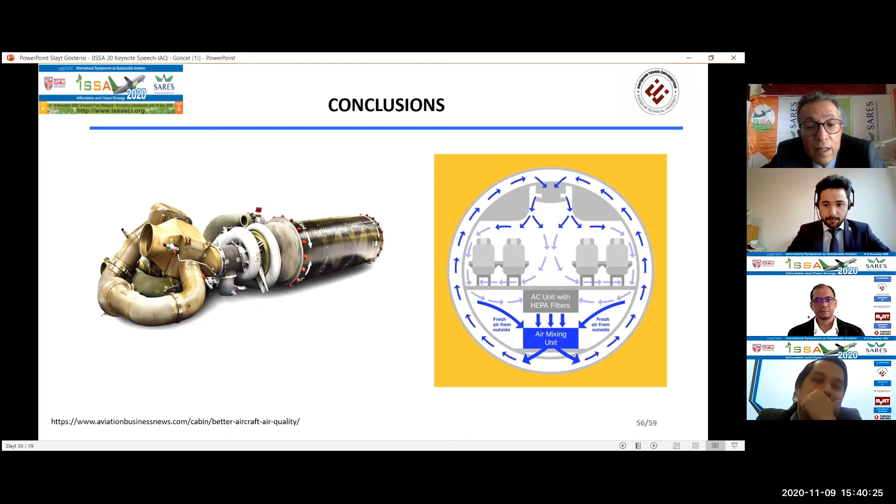We received a substantial number of complaints relating to the flight by passengers and crew: contaminants, cleaning agents, hydraulic fluids, ozone; psychological effects, fatigue, noise, passengers sitting too close together, jet lag; cabin environment, pressure and humidity, airborne particulates.

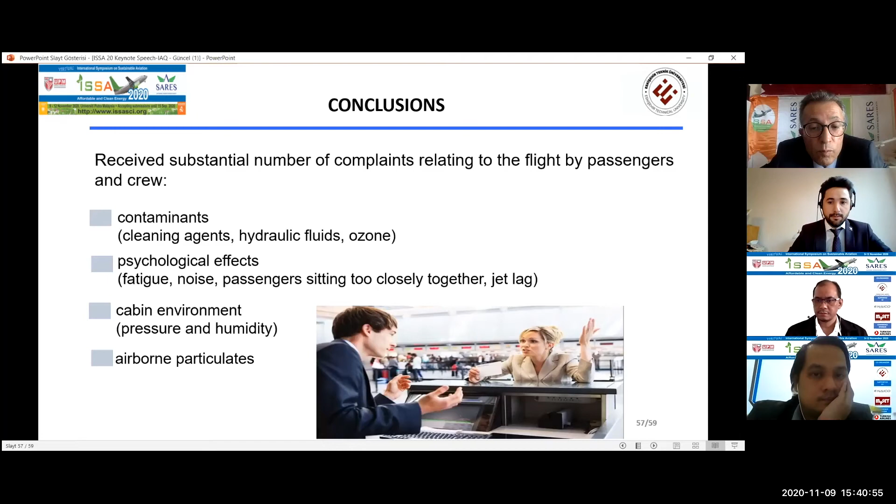Future studies in this area will be helpful in establishing a desirable indoor air quality in aircraft, and these efforts will lead to the preparation of indoor air quality standards for aircraft, particularly for long-distance flights. Indoor air quality meeting higher comfort needs and having no health or safety risks will be achieved.

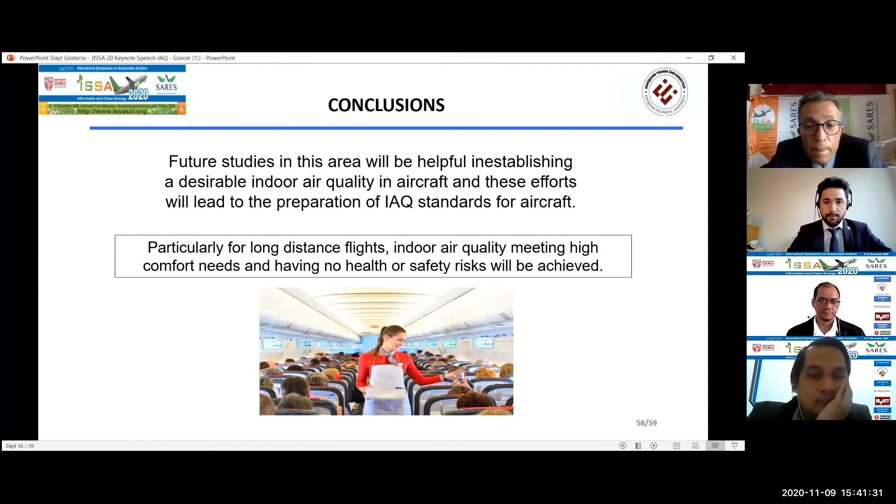I think you don't think to get on aircrafts after this presentation.